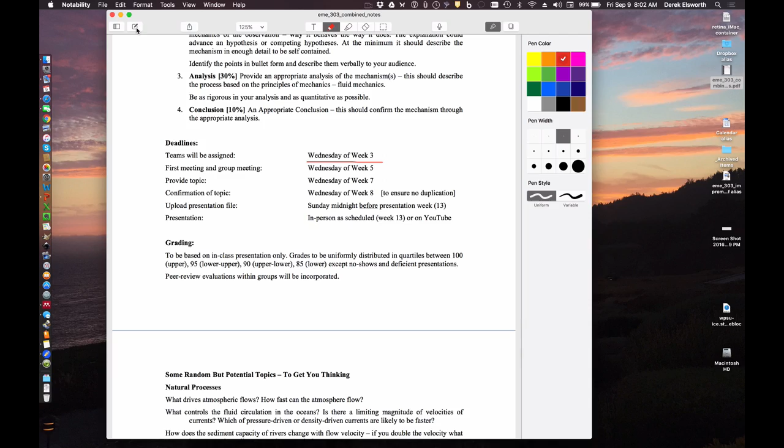So what we'll talk about today is buoyancy, after we finish off our final discussions on forces on structures. That's our plan for today.

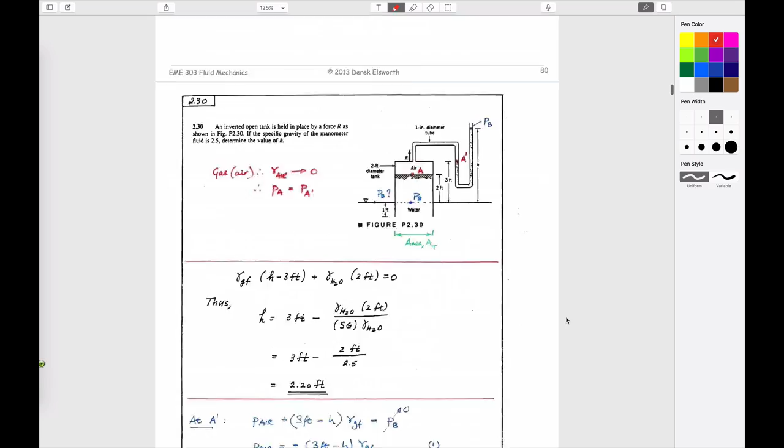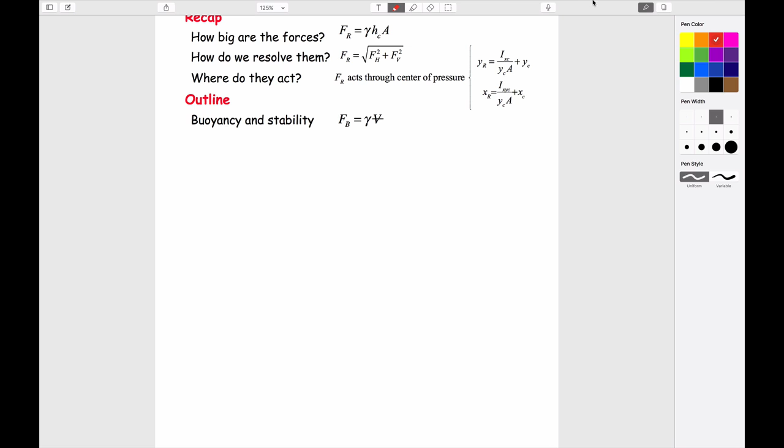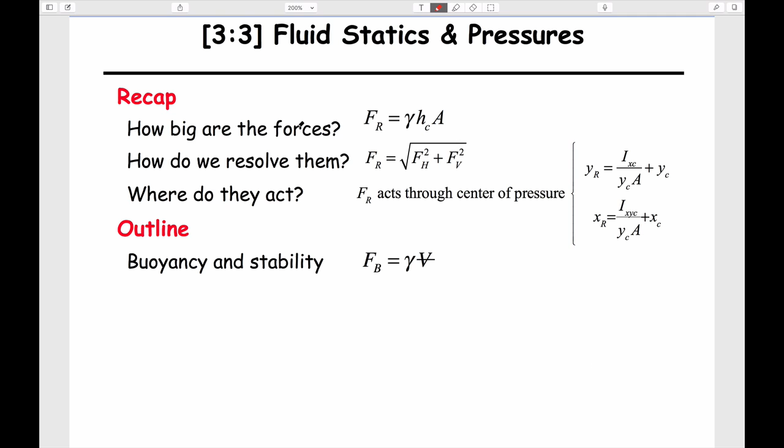And as usual, we have a preview of exactly what we will talk about. So our discussion today will end up on buoyancy, but of course buoyancy is really part of fluid statics and pressures.

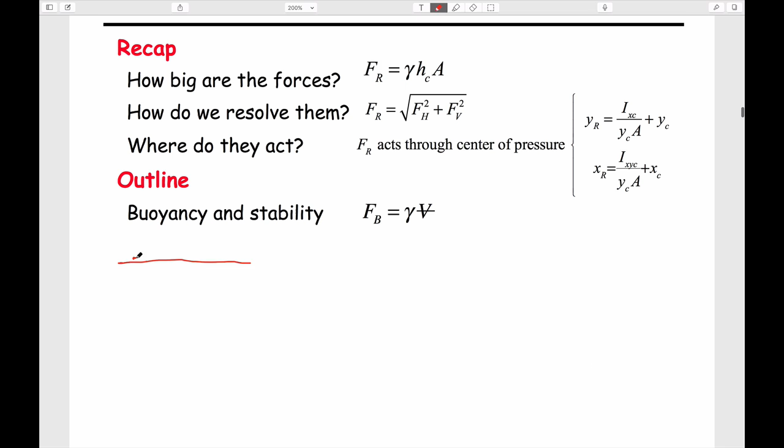We've made the point, it's probably worthwhile restating this, just because it's such a key part of what we're dealing with. And that is that if we have a liquid, and we have, say, a structure underneath that liquid, which is of some length, and I won't draw it in the third dimension, but this is the water surface.

We can always calculate the magnitude of the force acting on that if we know the unit weight of the fluid, if we know the area of the plate, and if we know the depth to the centroid, H sub c. Very specifically, it is the depth to the centroid, not the in-plane length. That is how we calculate the magnitude of the force that would act on this, which would be F sub r.

If we want to know where that force acts, it does not act at the centroid. It will act at the centroid if the fluid pressure is uniform, but that's rarely the case. And so to calculate exactly where it acts, we have a variety of things that we can do.

The first one, so we know exactly where it acts - what we'd like to know is where it acts, and to do that, we will make a coordinate system directed along this plate in the y direction. It will have its origin at the surface, where it intersects the surface. And we'd like to know the magnitude, the location where it acts.

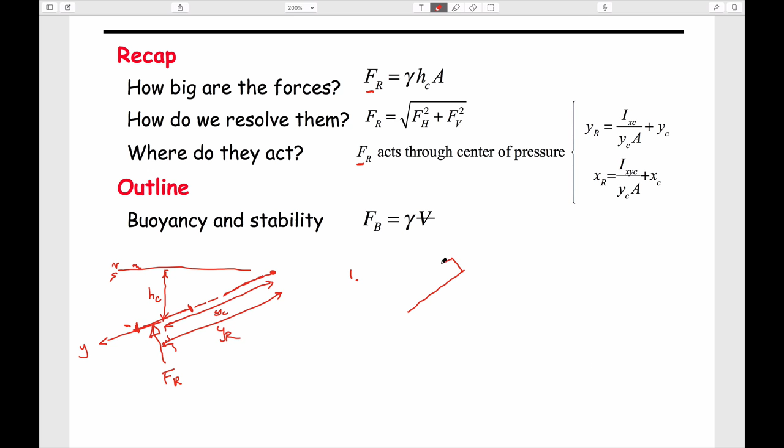And we want to calculate this distance, y sub r, the location of the resultant. That location is offset from the y-coordinate of the centroid, y sub c, by some small amount, by this amount here. We can figure out exactly where that location acts in three ways. The first way is to realize that the fluid pressure distribution on that plate will look like a linear distribution that doesn't start at 0 at the top.

And what we can do is make that into two parts: one which is a triangle, where we know that the force of the triangle acts at 2/3 of the length down its length, if this total length is 1.

We have a force for the square, which acts at half of its length down the length. And we want to figure out exactly where the resultant acts, which is some distance L sub r from the same location.

So we know we can calculate the forces from the areas underneath these pressure diagrams, getting F delta and F square. We know exactly where they act, and we know that Fr is going to be equal to the sum of those two.

And so we can take moments around any point, which will give us the moment that Fr has, multiplied by the length of that lever arm. That has to be equal to the force due to the triangle multiplied by 2/3 of the length plus the force of the square multiplied by half of the length, and the total length is 1.

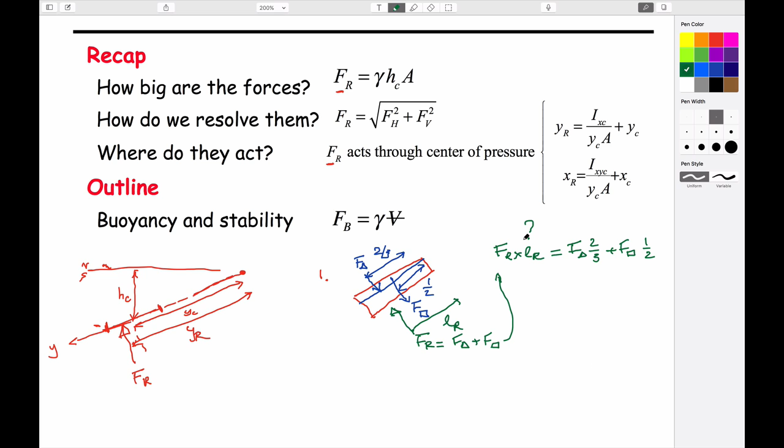The second way you can do it is, if I go back into this mode, we can take this - I'll draw it in perspective now. This is the plate that we have. We know that if we look at that plate, we can calculate the force in the same way, but we can calculate the location where the resultant acts, which will be this point here, F uppercase R.

And if I draw this here, this will be Y sub R, where this is the surface of the water - this is where it intersects the surface of the water. This is the centroid, which is Y sub C. And we can always get it by using this expression here.

Y sub r is going to be equal to this apparently slightly complicated expression, but this is a standard result. This is b times a cubed over 12, as you saw last time, the geometry of this plate. The slope distance of the centroid, the area of the plate, which is this area here, plus the slope distance to the centroid.

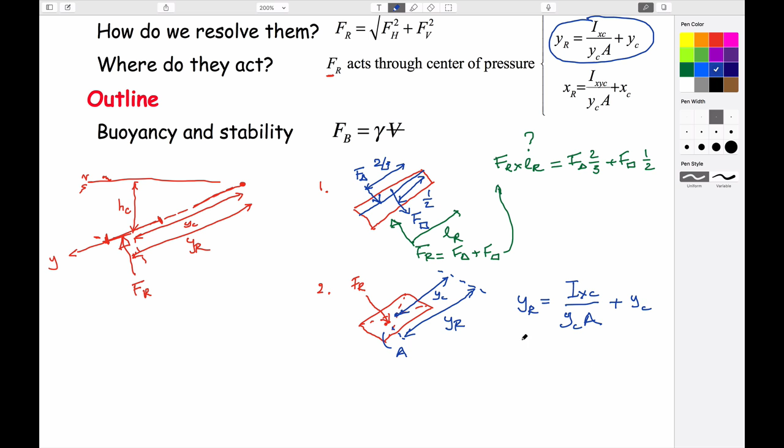So this always tells us, since this number is always 0 or greater, always positive, that it's always going to be slightly below it, as you'd expect from looking at the moments - same rationale. But this gives you it in one step, and you calculate the resultant in the same way, just by using this, where this is the depth of the centroid, H sub c.

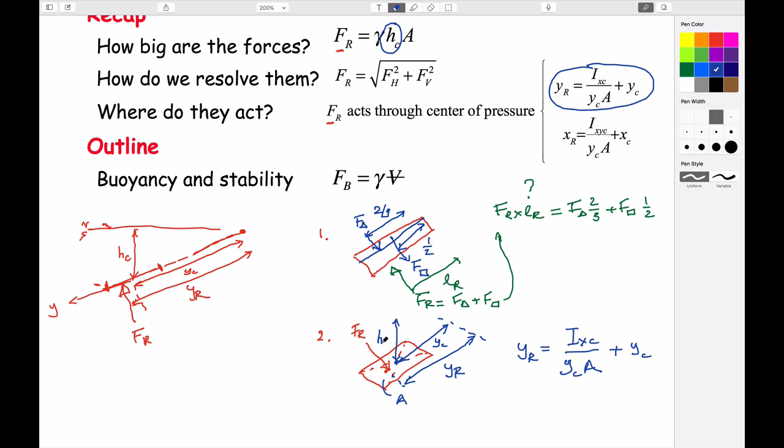And the third way, one of the ways that we'll talk about today, is using free body diagrams.

So very straightforwardly, what you could do is if you had this plane here that intersects the surface, you could draw a free body diagram that included a triangular pressure distribution on one side, a triangular pressure distribution on the other side, a weight of this fluid acting downwards, and also a triangular distribution on the side. Let's not talk about that now, but let's move towards dealing with that - you can resolve all the forces. So that's the third way that you might have to use.

Everything we've talked about so far has been on flat surfaces, a plane. The submarines that you saw are curved surfaces, and so we have to maybe take a different tack to that.

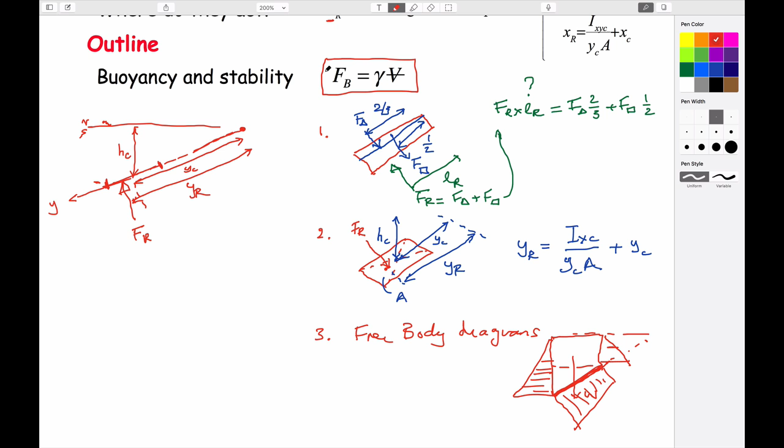The other expression that we'll use today, which is related, of course, to fluid pressures on structures, is the buoyant force that acts on components. Let's deal with that before we move on - you've probably seen this before. It's Archimedes' principle, so let's talk about buoyancy.

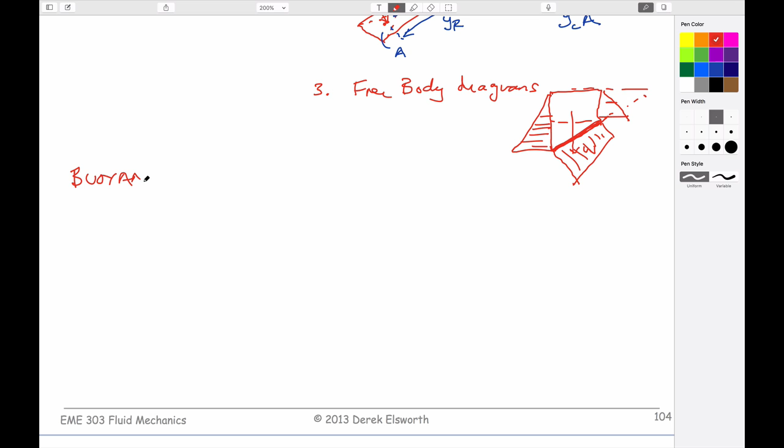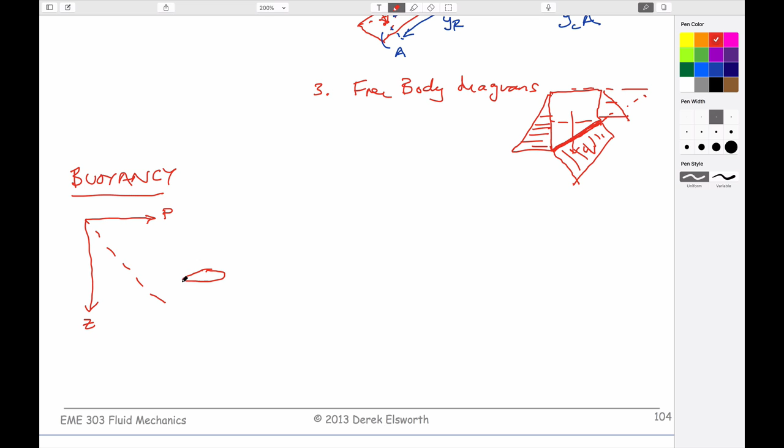And the idea is just this. We know that fluid pressures, as you go down within a fluid, will increase linearly according to the unit weight. We know that if we have a bucket, which was our first entree to this, you can think of it as a differential cube as well. We have a fluid pressure acting here, and we have a fluid pressure acting here.

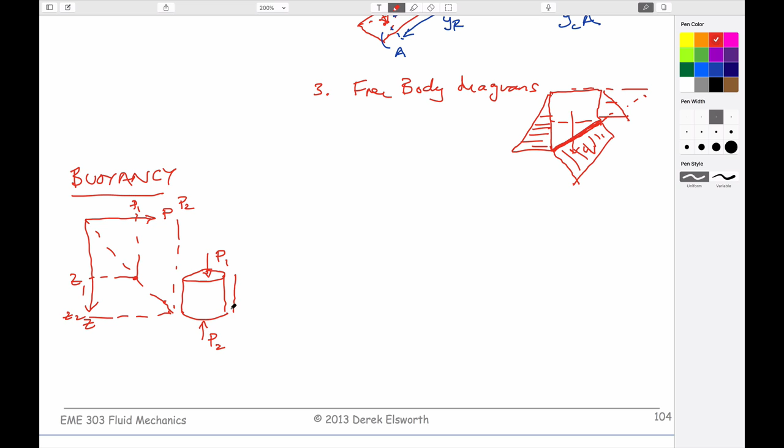We know from this diagram that the two fluid pressures will be different from each other. This is P1 at Z1 and P2 at Z2. P2 is obviously greater than this. This has some height, call it H. And so there's a difference in these pressures because of this.

So if you do an equilibrium calculation for F equals ma, it's not accelerating, so this has to be equal to 0. So if we convert these pressures to forces, we know that the force acting upwards is greater than the one acting downwards, so it would accelerate. So if F is finite, it would accelerate. So what we have to account for is the fact that there's a weight acting downwards.

And we know that when there's a weight acting downwards, this is an equilibrium, because that was our equation for fluid statics. Let's make life easy for us and move this bucket up to the surface so that now it sits on the surface.

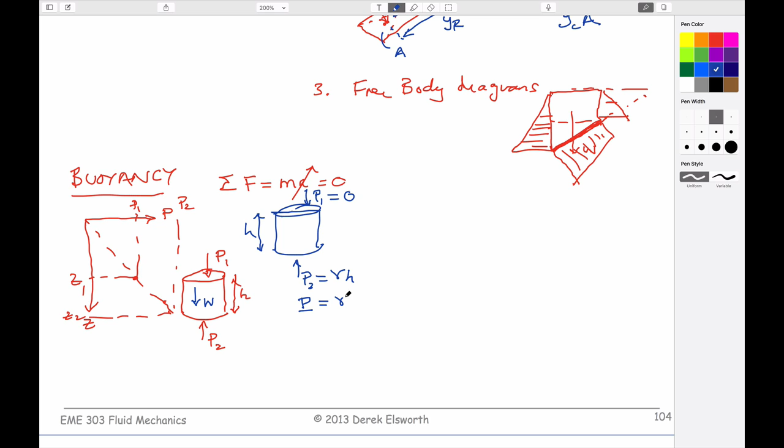The pressure acting here at pressure 1 is 0 because of the atmospheric. The pressure here is equal to the unit weight times the depth below the surface. And the force that acts at this point, which we'll call uppercase P, is equal to the unit weight times the height, which is the pressure, multiplied by the area. This is the area, which is this top of this figure here. This is the area.

The weight acting downwards due to the water is going to be equal to the volume of this bucket multiplied by the unit weight. And of course, the volume is equal to the height times the area multiplied by unit weight. Right? This is this.

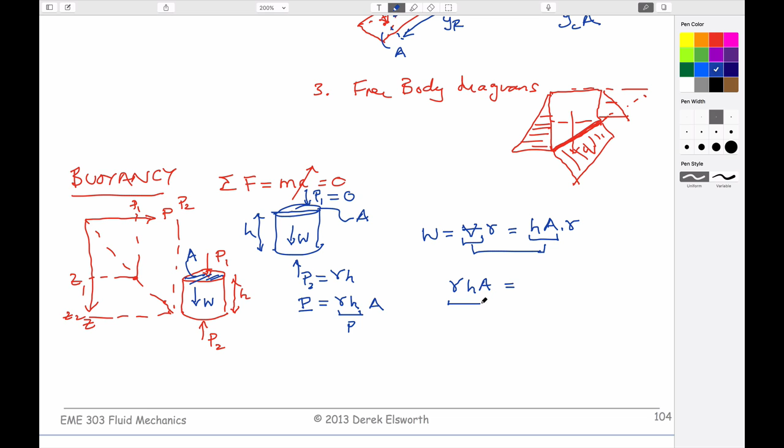And so we know that this is in perfect equilibrium, because the pressure acting upwards, which is equal to gamma HA due to this, has to be equal to the weight acting downwards, which is equal to gamma HA. This is due to the weight acting downwards, exactly balanced by the pressure pushing up.

What happens if you empty out this bucket, a weightless bucket with corners to it, so that the unit weight goes to 0? If the unit weight goes to 0, then this is 0, and there's an extra force that's applied which will pop it out of the water.

And so this buoyant force, due to that, is just going to be equal to the unit weight of the fluid times the height times the area, which is equal to what you know already, unit weight of the fluid times the volume. It's the unit weight of the fluid that is displaced, multiplied by the volume of fluid that's displaced. So this is exactly the same as this expression up here.

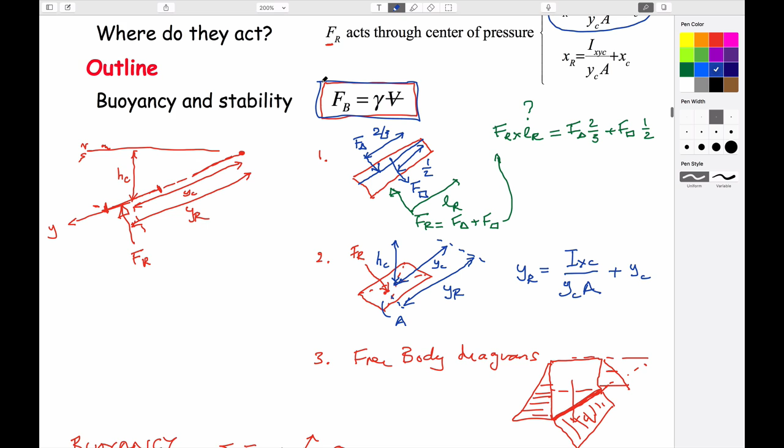I'll go down a second. And so that's a standard result. So that's just the easiest way to derive it. We derived it so the top of the bucket is on the surface because there's no pressure on it.

We know that it's just a difference between the pressure acting on the top versus the bottom. And no matter where you go down here, the difference between those pressures top and bottom for the same height is always going to be the same. And so you can add a pressure on the top, and the difference between the pressures is always going to be an imbalance, which is forcing it upwards. So that's buoyancy as we need it.

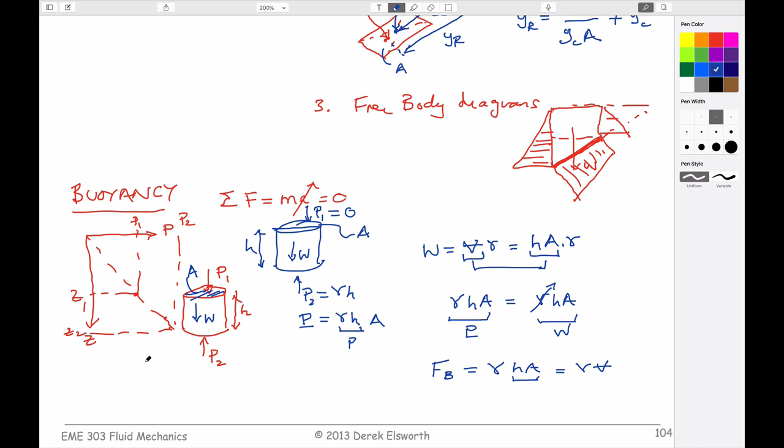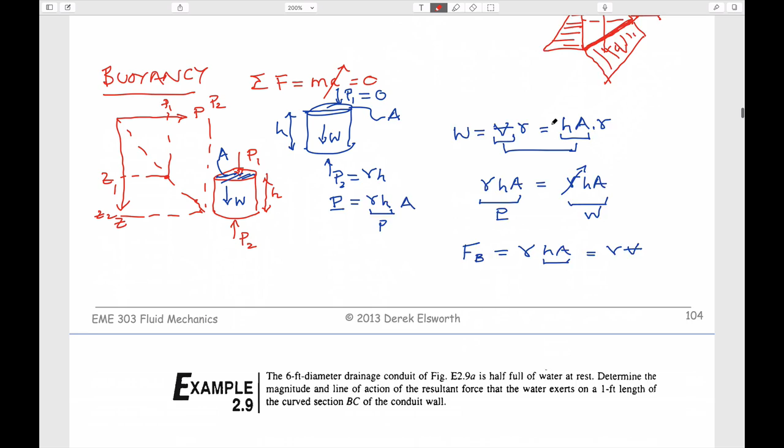Okay, all right, so let's go through some examples. I'll switch this back to my favorite red. We'll talk about force on structures, and then we'll move on to buoyancy after we go back there. We'll do these kind of in broad brushes as to how we might approach such problems.

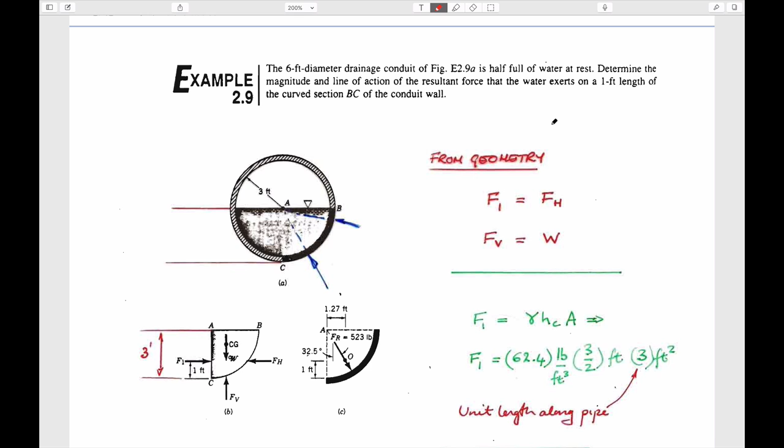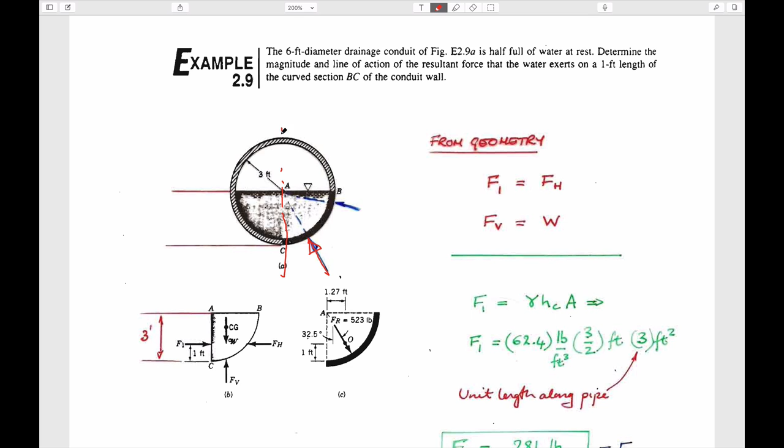So here's the first one. So we made the point that we want to know how to make calculations for fluid pressures on things that aren't flat anymore. One way in which we can do it, if we wanted to try and figure out exactly what the resultant force is that's acting on this side of this pipe, if we cut it down the center line here.

In other words, we cut it on this center line and break it in half. It's actually the third of the methods that we talked about, dividing it into a free body. And so the free body would look like this figure here. And it comprises the actual fluid-filled pipe, which is outlined here.

A force that is applied on the side, which of course would be equal to this triangular distribution of pressure growing at depth to some fluid pressure which is equal to 3 times the unit weight at the bottom.

If it's not accelerating, it has to be reacted against by a horizontal force which we call F uppercase H. And so those have to be equal to each other. So we know exactly how to calculate this, right?

F1 is equal to area, unit weight, depth of centroid. Depth of centroid is going to be what? Area is going to be 3 feet, 1 foot into the page. So this is going to be 3 times 1. And you know the unit weight. So we know what F1 is.

Where does it act? It comes in contact with the surface. It's triangular. So the location where it acts is going to be 2/3 of the depth down. So it's going to be equal to 2 feet.

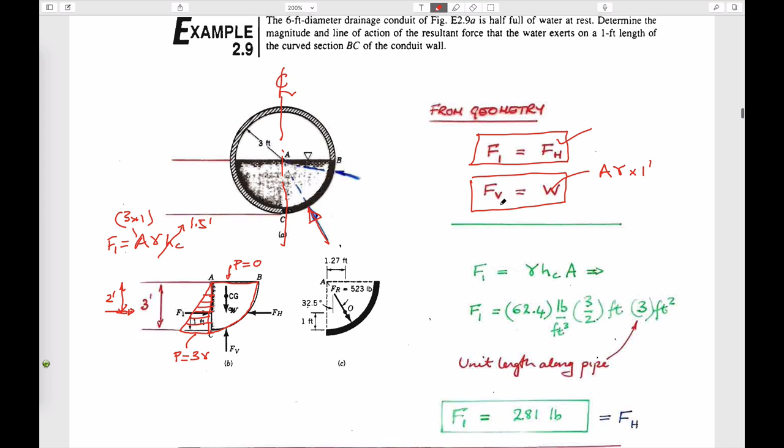Where do they act? How do we find that out? Well, in this example in the book, they say, well, the surface is curved, so all the forces have to be acting perpendicular to that surface. And for that reason, all of these forces have to act through the center here, which is true. You don't necessarily know that, but that's the case.

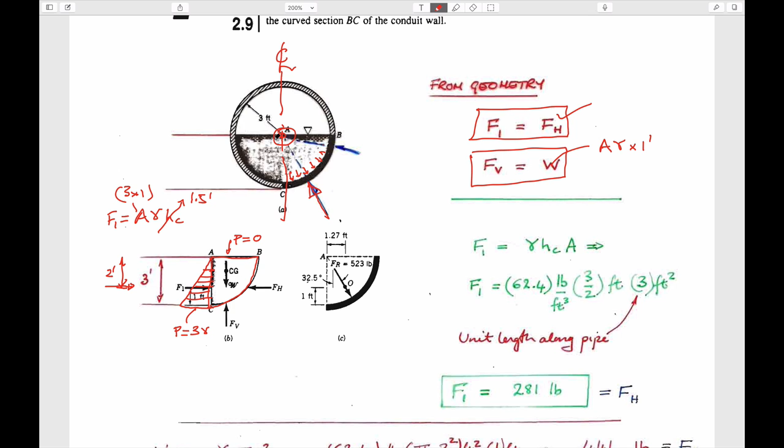What you could also do, if you wanted to know exactly where they act, is that you now know where this force acts, and you also know where this force acts. So presumably you could draw a free body diagram that was like this shape, that had these forces on it.

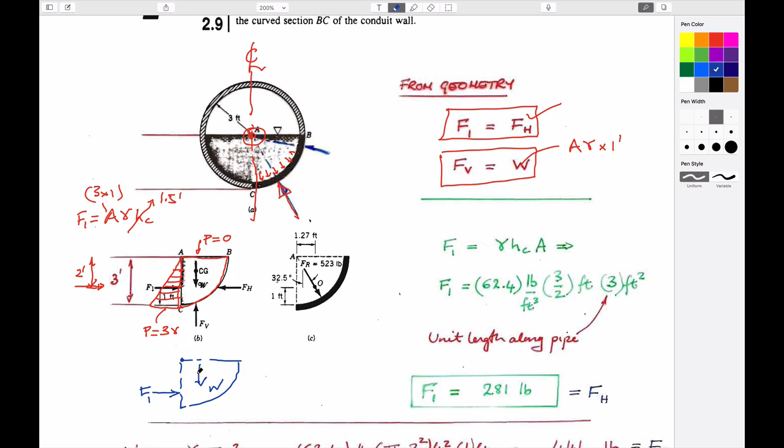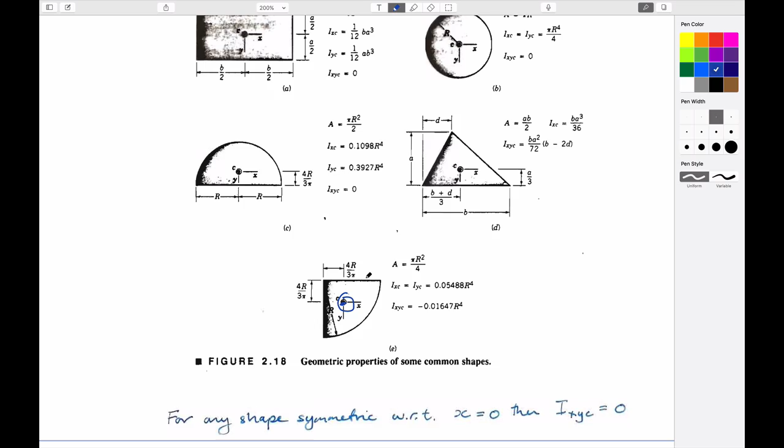It has force 1 acting at this point. It has W acting at this point. You know exactly where it acts if you look at the location for centroid of a quarter circle, which is here. 4/3 r over pi, just a standard result. So you know where each of those act.

And you have another force, Fr. You know what Fr is because you know that W and F1 give you Fr. So you can calculate that if you know each of these. So you know what Fr is.

So that you know the magnitude of this, and so you could do the calculation to be able to figure out, take any point that you want, take the moment of F1 times L1, take the moment of W1 times LW, and take the moment of this around some offset for this, and you'll find that it goes through this central portion.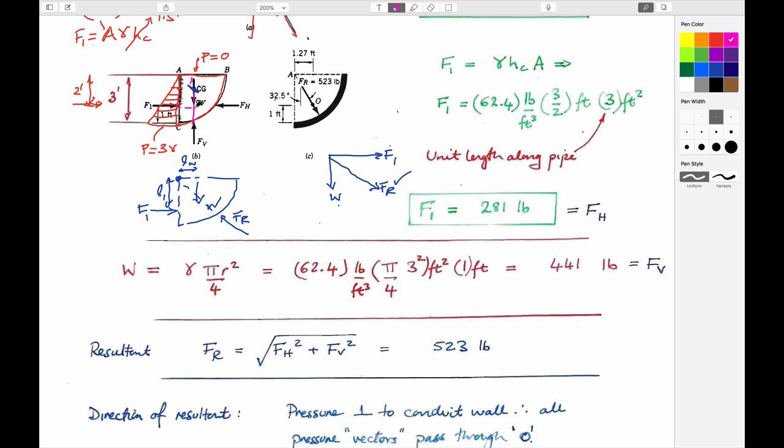So that's the other way to be able to do that. And so you'll find out that actually, because of this geometry, since you know it goes through the center of gravity here, you know exactly where this goes, you'll find out that the horizontal force goes through a point which has to be somewhere on this line here, on the center of gravity, and it'll be exactly through this point, and its trajectory will be through this point O. So you can maybe prove that to yourselves.

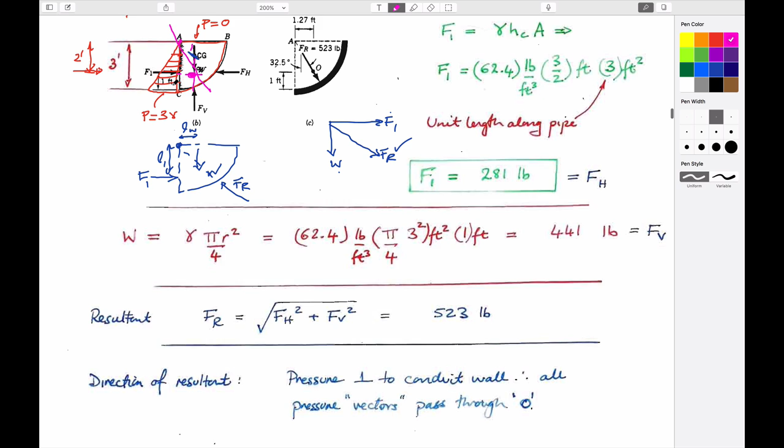So the working's there. So if you don't quite understand exactly what we're doing, then just go through this at your own pace and figure it out. But it's the third method that we talked about in terms of being able to take moments.

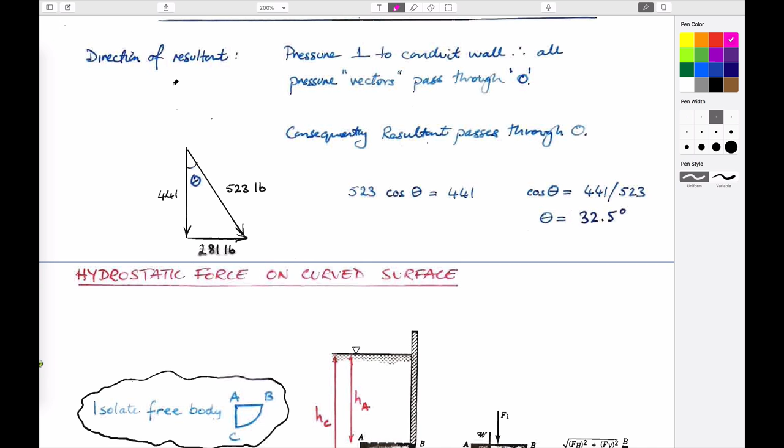So a slightly, I guess a modification on that, well, actually the same question really, that differs only in terms of what the magnitudes of the forces are, is that to calculate what the force is that's acting at the resultant on this.

Again, you can draw a free body. You can isolate this portion and figure out that all the forces applied to it have to hold it in one place. And the forces now are slightly more complicated. The same weight is acting down through this as it was before.

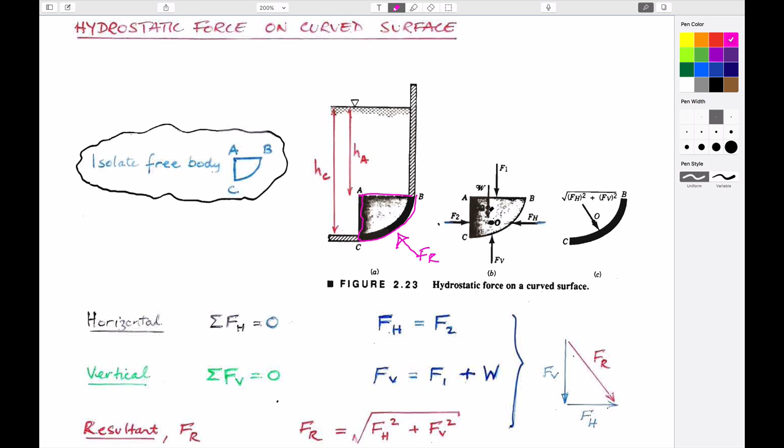The force acting on the side, F2, has to be a little bit different because now it starts off at this place at some pressure. But of course you can still calculate F2.

What would F2 be? Unit weight, depth of the centroid, times the area. The depth of the centroid would be halfway down here. So this would be h sub c from the surface. So you can get the magnitude of F2.

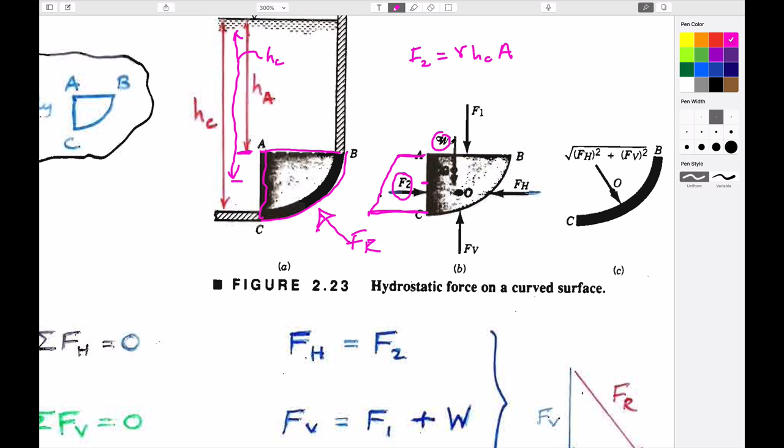You can get the magnitude of F1. It would also be the same way. The depth of the centroid is what? This is HC1, this is HC2. So you get this for F2, and F1 would be the same: unit weight, HC1, times area 1.

The area, of course, is the length of this section here multiplied by the distance into the page. So you have that. So you have this as well.

And to be able to calculate the resultant, F sub r, you can always get the resultant if you know what each of these are. But we don't know what each of these are. So what we need to do is do a force balance.

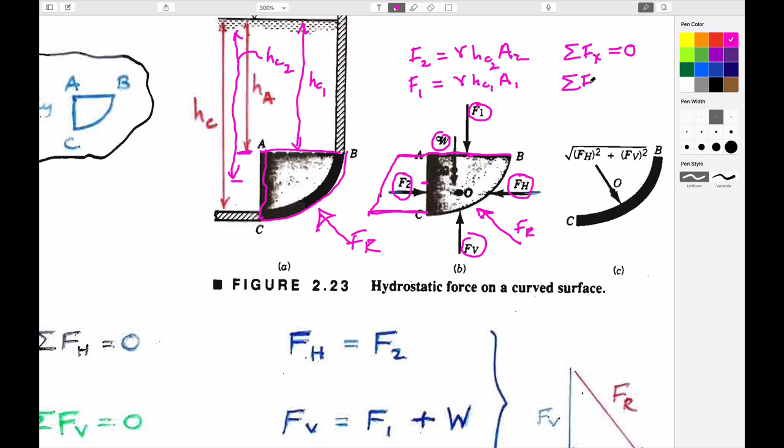Sum of the forces in x has to equal 0. Sum of the forces in y has to equal 0. So, zooming out one step: if you do the balance in the horizontal direction, F2 has to equal FH. We know what F2 is because we said we can calculate it, and so we can calculate the magnitude of this.

We do a balance in the vertical direction. We know F1. F1 plus W has to equal FV. We know F1 from this expression here. We know the weight that's applied because of the volume and unit weight. And so we can calculate what this is.

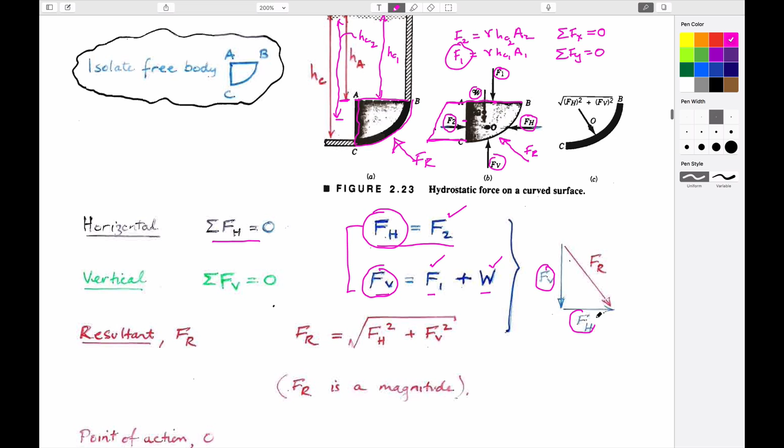If we know both the horizontal force and the vertical forces, we can calculate the resultant just by using Pythagoras, which is this.

And if we wanted to be really smart, we could use exactly the same technique as before by taking moments about a point to figure out where it acts. But let's not do that.

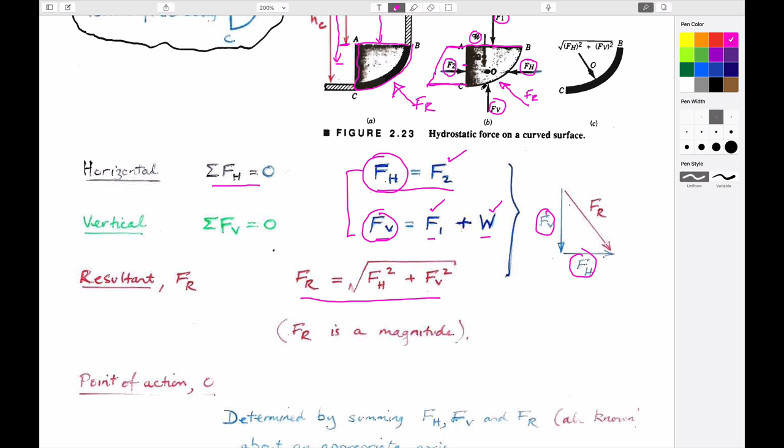So it's just a matter of dividing it up into something you can imagine cutting a contour around this thing so that you can release it, and then figuring out what forces are applied to it to keep it in place. A fluid pressure on the left-hand side, balanced by a reaction by the wall on the right-hand side. A fluid pressure acting on the top, plus its weight, balanced by an upward force of the fluid of the wall at the base. And you can work your way around it.

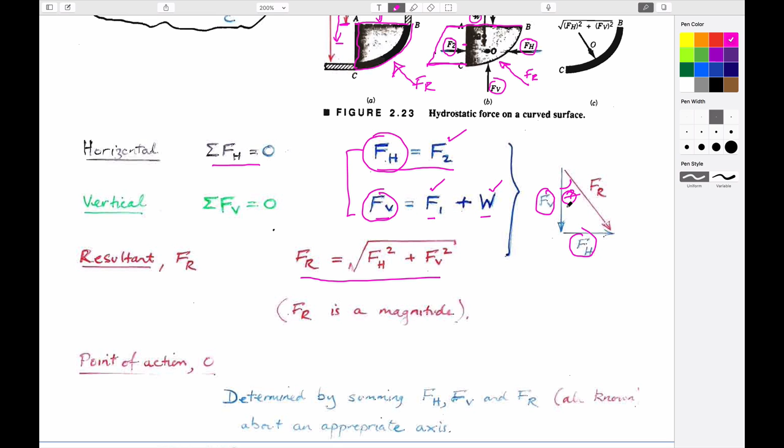If you know the magnitudes of these, you can also calculate the angle theta from this as well, uniquely. So it's just trigonometry that you have to use. It becomes a little bit of housekeeping, but I'm sure you guys are up to it.

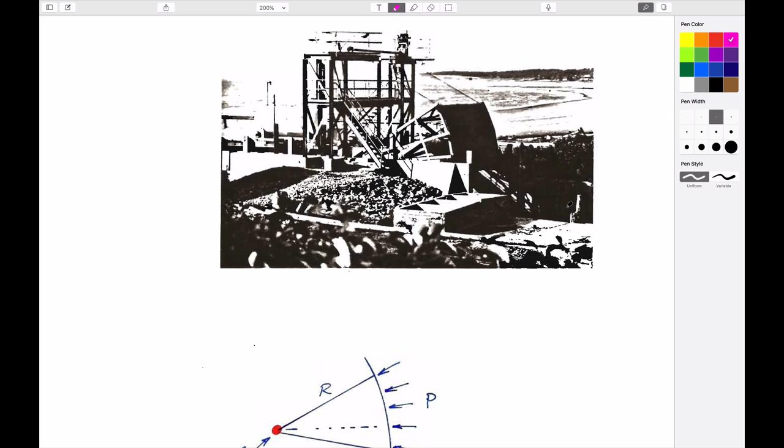Yes? Well, look at these and use the TAs if you're having problems with it.

Tainter gate. This is a picture of a tainter gate, actually taken many years ago in Nova Scotia. The idea of a tainter gate is that from this idea of curved surfaces, if the gate is an arc of a circle, then by definition, all the fluid pressures are acting perpendicular to that surface.

And so by definition, they are all directed directly through the center of that circle, and therefore there's no net moment applied to this. So if you take the moments about this circle's center, you find there's zero moment. There's a big force that acts in the horizontal direction, but no moment applied to the gate.

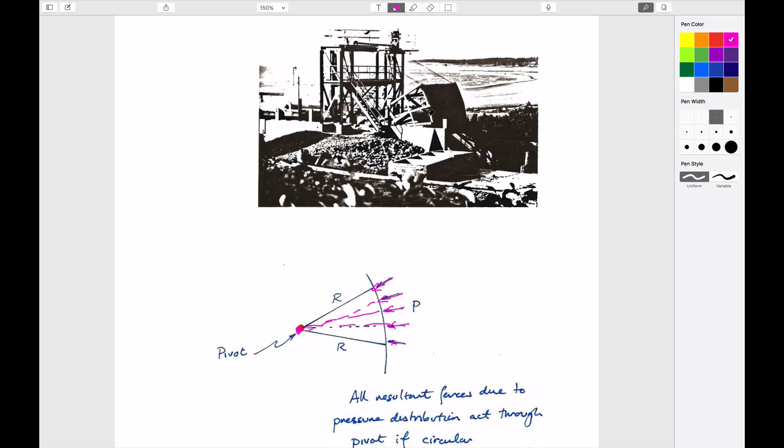So the net result is that you can make a gate that is pretty flimsy, just with these metal struts in this particular case, and with a flat surface on the back. So a tainter gate is exactly what that is.

So we won't talk about that. Mega tsunami, too complicated, too complicated.

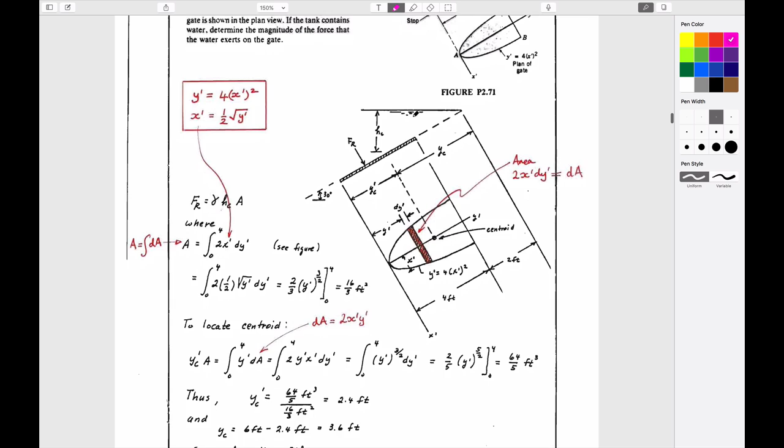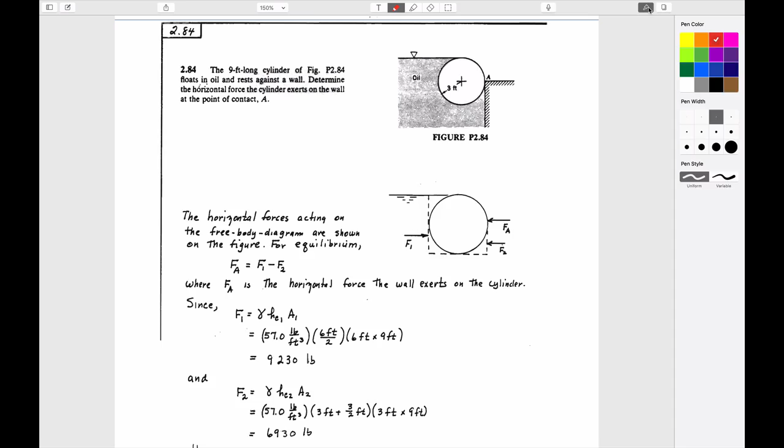Let's do some others. We'll morph into talking about buoyancy in a second, but this may be the final one that we talk about. Let's just talk about this, again in terms of how would we solve this problem.

So here's a question. You have a cylinder floating in oil. Oil comes up to the top of the cylinder. The cylinder butts against a wall. Not sure exactly what this is supposed to be, why you'd have a big puddle of oil, but no matter. The question is, what is the force that gets applied against this component here, FA here.

And so what do we know about this? How would we deal with this as a free body? Well, if we want to know what FA is, we can just divide it into a free body, and the easiest way is to divide it into one that includes all the different parts of this. So this is the free body that we're going to take. It's kind of outlined here.

There's a fluid pressure that acts as we go down here on the left-hand side. I guess the other thing we could also say is that we need to calculate FA, so we need to sum the forces in the horizontal direction, and they need to equal 0. Also, what has to be true is that the forces in the vertical direction have to be 0 also, but we're not asked that, and so we don't care about this.

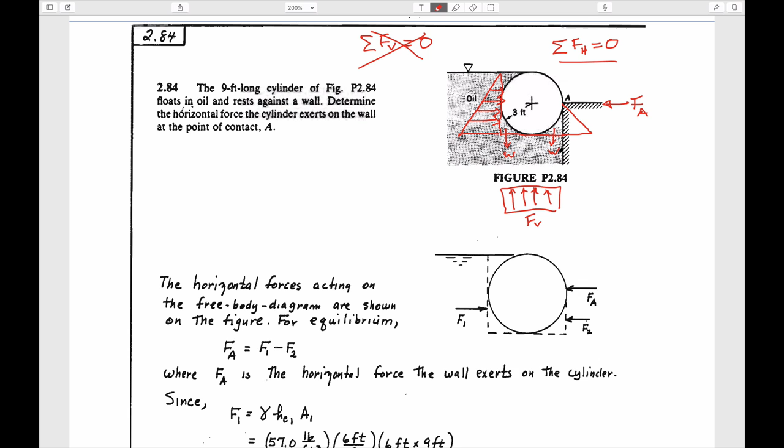But that really can't be the case, because we know that if we go from this point here, where the pressure will be this amount, and we go through the fluid to get to this point here, we're still at the same elevation. We know that dp dx equals 0. So the pressure here has to be exactly the same pressure as here.

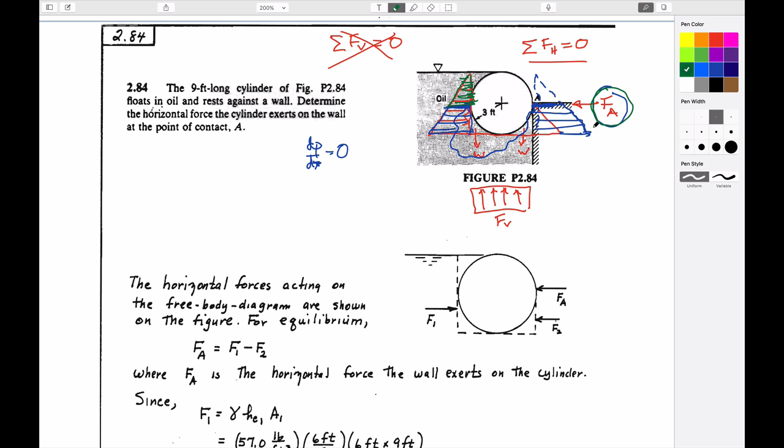So if you do that, you can do the calculation. F1 is equal to what? Unit weight, times the area of this plate, which would be this area here, this is the area. The centroid of this plate is going to be equal to this here, which is HC.

And we know F1, it's just going to be equal to this distribution here. We know that F2 is going to be given by exactly the same equation. What are those going to be? Well, the plate is going to look like this if I draw it in perspective.

The height to the center of this plate is exactly the same as if it was on the other side, from the surface, because that's really where the water is coming from. So you can think of this as an imaginary surface here, because this is going to be the average magnitude of the pressure, which is HC2, this is this here.

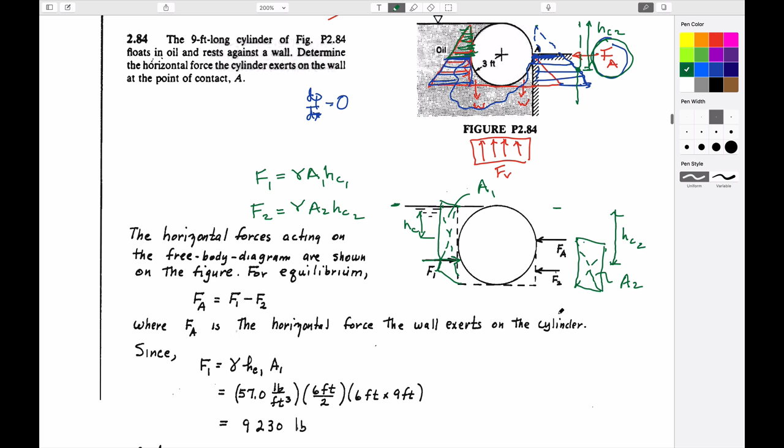And the area of the plate is just going to be A2. And so you have this here. And so physically, it'll give you a smaller force acting F2 than F1, and therefore FA has to be a positive number. So this is physically how to do it, but this is conceptually why it looks that same way.

The total area of this triangle is acting on this side. The truncated area of this triangle is acting on the other side. And so you have to basically add another green force on the top, which is equal to FA. Same thing. So you could think about solving it in a couple of different ways.

Okay, so the key thing to figure out is that this is not atmospheric pressure acting at this point. And so it has to be sealed. And so you could imagine that since the force acting to the right is larger than the force acting to the left, then it's physically pushed up against this wall, and that's what causes the seal here.

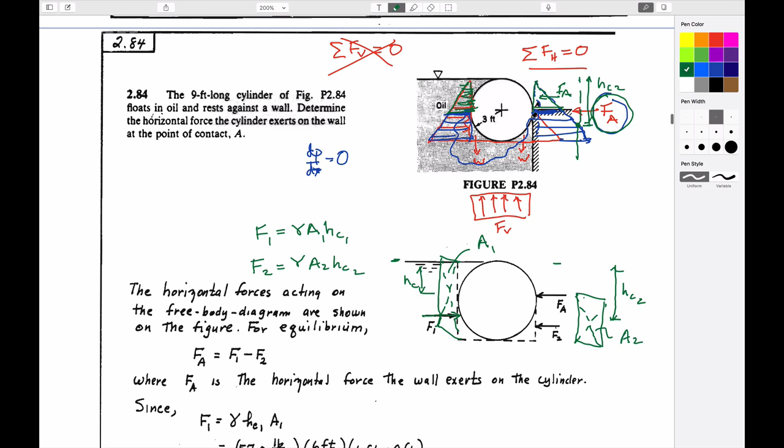So this layout here is basically an exposition of what we just said, and I won't go through this, but I'll let you show this to yourself.

This is the idea that we have a gate here, which is inclined, which is 1 meter high, has water held up behind it. The gate's at 45 degrees, and so we know the length of the gate is 1 meter times square root of 2. It's water behind it. And it's just to make the point that we can solve this problem in 3 different ways, and we should get exactly the same results either way we do it.

We could do it by the Centroid Method, which is the first one -- well, it was the second one we talked about when we started off today. And that is, we could look at this as a plate which has a centroid on it. We want to find out where Y sub R is, and we can do it by figuring out what the force is by this expression, where it acts from this expression, and we find out that these are the forces, and this is where it acts.

We could also do it by the pressure prism approach, where we take this gate and we divide it into the pressure prism that acts on it, which we know is this one. So this is really the first one that we talked about today.

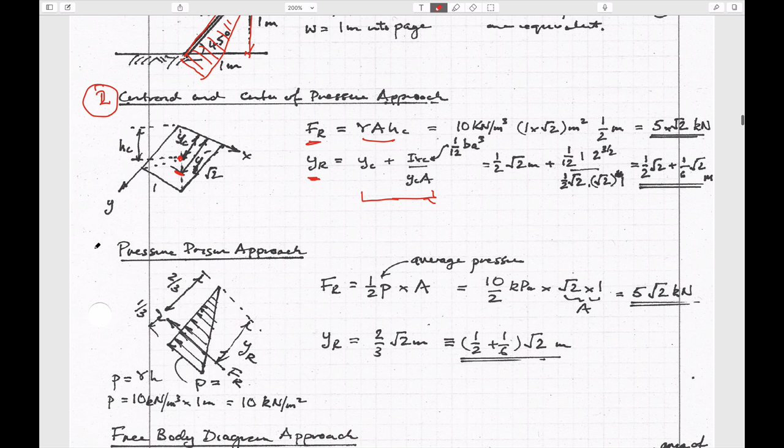We know that the pressure at the bottom of the gate is just going to be equal to the depth y times the unit weight. We know that it's a linear distribution. We know that for a linear distribution, the resultant will act 2/3 down the distribution, or 1/3 from the bottom.

And so we know where YR is, and we can also calculate the magnitude of the force just by taking half the pressure in this particular case. So in other words, half the maximum pressure would give us adding this amount and subtracting this amount, if you understand physically what we're doing. So we can get the magnitude of the force just by looking at this pressure distribution, calculate it how you want. It's just the area under this triangle, which is equal to half the magnitude multiplied by the total height.

Or you could take the magnitude here and divide the total magnitude by half. And the location where it acts is 2/3 of the way along the length of this boundary.

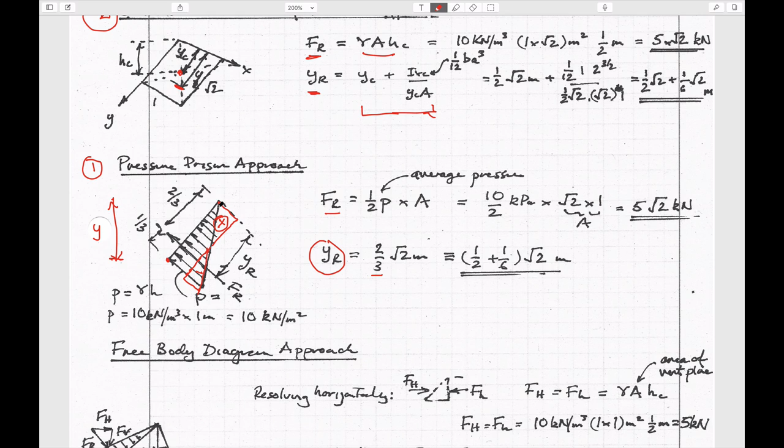And if you really want to torment yourselves, you can also do it by taking a free body. This is the gate. This is the pressure prism that acts on that gate. This is the free body of the fluid underneath it. We know the fluid pressure that acts on the bottom of that block of water.

We know the pressure that acts on the side of that water, and we can resolve to figure out exactly what the resultant is. And so certainly we can calculate what this is and know where it acts.

And we can calculate the magnitudes of the resultant by basically equating this. If we know what the horizontal force acting here is, we know that has to equal this.

If we resolve vertically, we know that this has to be true. We do know what this is, and what this is. So we can calculate the magnitudes of these other numbers, which are these two here. If we know what this is, we can calculate the value of the resultant. And if we know the magnitude of the resultant, we can then take moments about any single point we want

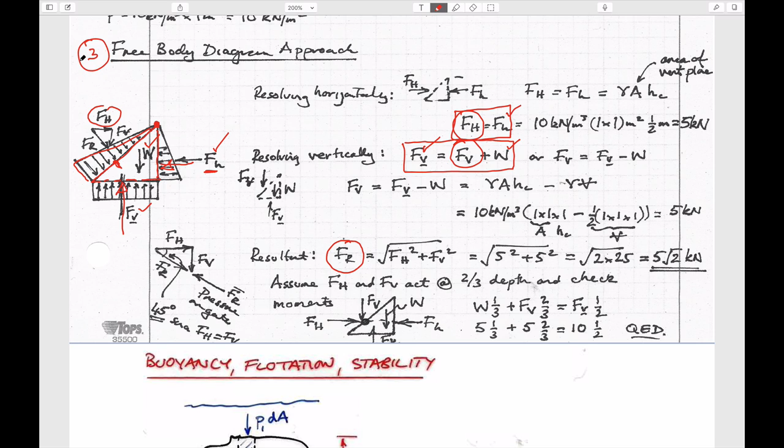So the last one is kind of a complicated one, but it does make the point that all of these three methods should give you exactly the same result. They're not different at all. They just are different ways of doing the calculation. So the last one's kind of overly complicated, but it does make the point, and if you feel so inclined, you might check it.

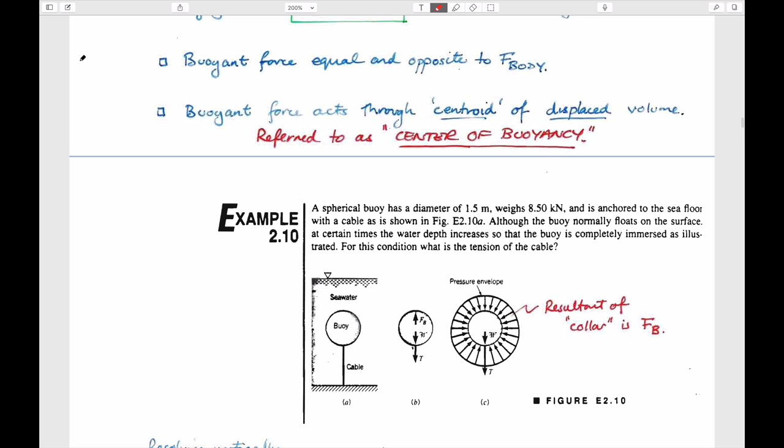So let's switch gears. We made the point that forces acting on structures is really the equivalence of buoyancy, or buoyancy is the equivalent of that behavior. And it results because if you look at the pressure distribution on, say, a structure, and you remove the fluid from inside that structure, then all of a sudden there's an imbalance of the fluid pressures at the bottom, overwhelming what was in equilibrium because of the weight of that container. And that net force is the buoyant force. And so again, if we look at structures, we can calculate free body diagrams of exactly what's going on.

So here's an example to calculate what is the tension that gets applied in this cable if you have a buoy which has a certain volume. So again, we know that the buoyant force is going to be acting upwards against gravity. We know the weight of the buoy, whatever it's made of, steel or whatever, is acting downwards. And we can presume that in the cable there's some tension that's acting downwards. So that's basically what's given in this free body.

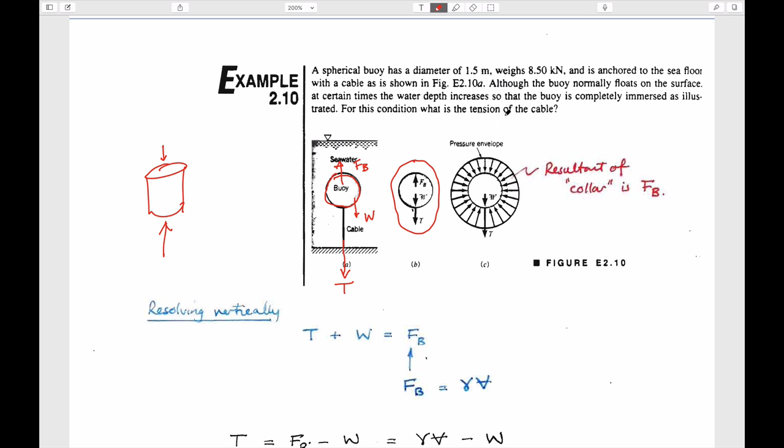The reason for buoyancy is that the fluid pressures acting downwards are less than the ones acting upwards at depth. We know that. We just did that for our container that looked like this, where there's a bigger force acting up relative to a smaller one. This is what it would look like on a structure, but it's basically the same idea.

If we resolve things vertically, we have the weight and the tension acting downwards. We have the buoyant force acting upwards. We know the buoyant force is equal to the volume of fluid displaced multiplied by its unit weight. And so if we know what the weight of this is, if we know what the buoyant force is, then the only thing that we need to calculate is the tension. So again, just resolving vertically. And so all that's important, I guess, to remember here is that the buoyant force is the volume, the unit weight of the fluid that's displaced. It's not the density of the structure, it's the density of the fluid that's displaced.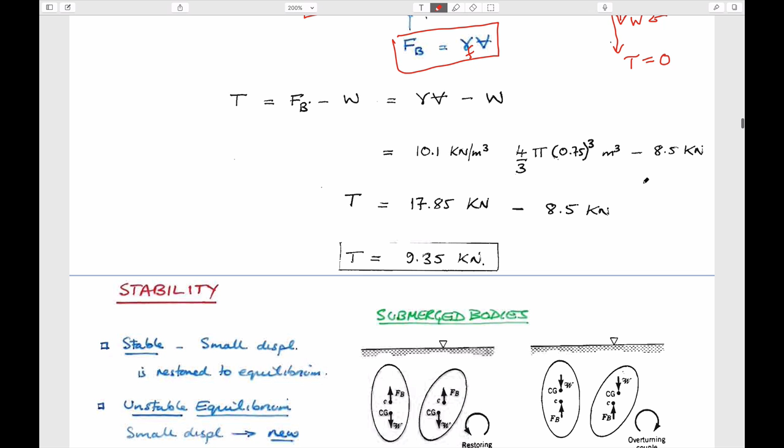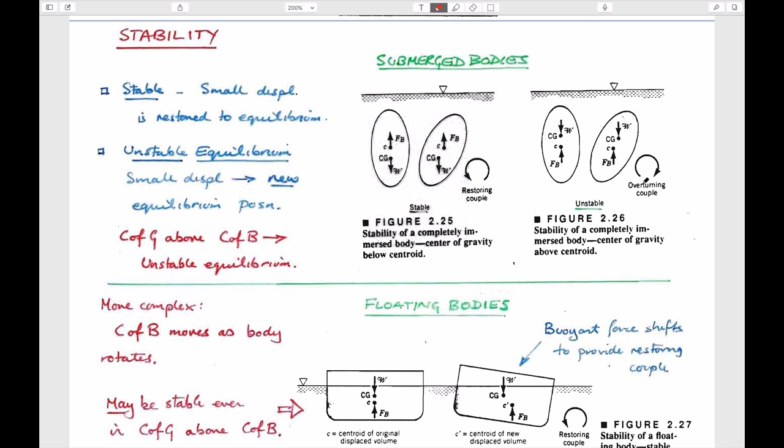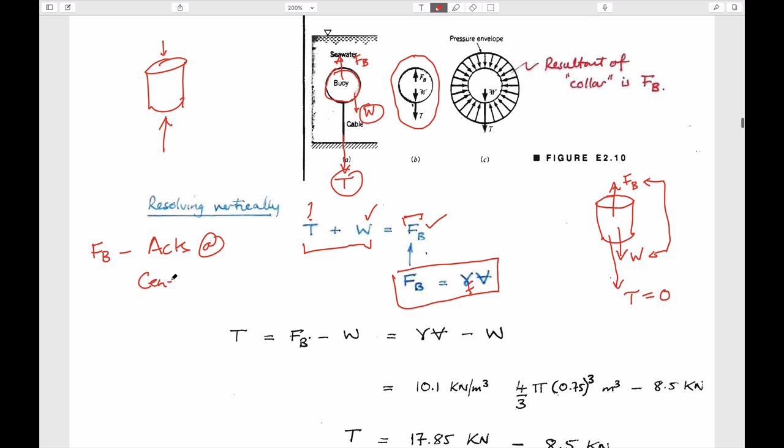So the other thing that we can also talk about is stability. The one thing I didn't mention, which I should mention, is that the buoyant force, it acts, we need to know where it acts. Center of buoyancy. Center of buoyancy is equal to the centroid of the displaced volume.

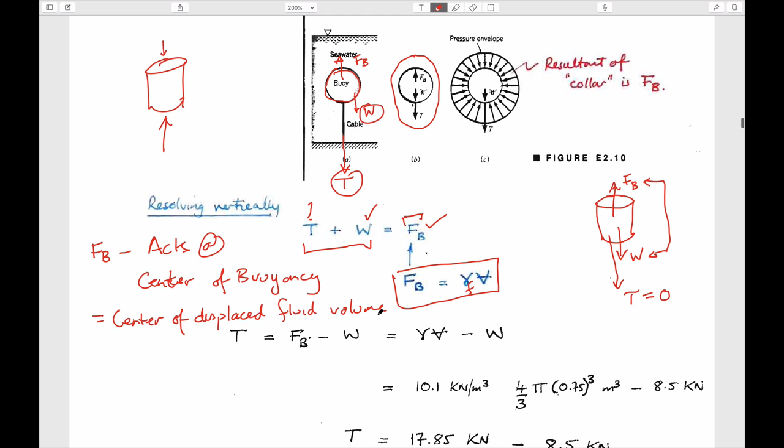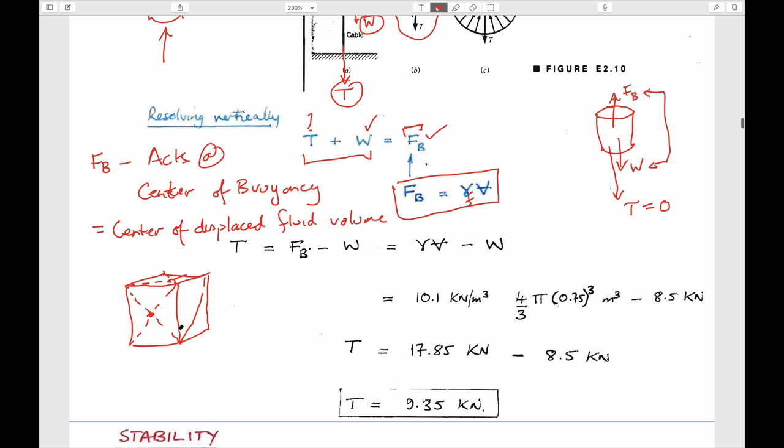So as an example, if we had a square block, then the center of buoyancy would be at the centroid of that block. In other words, you could draw lines here and it would be on that axis. If you drew lines on the top, it would be on that axis. And if you drew lines on the side, it'd be on that axis. So the bottom line is that it's dead in the center of this.

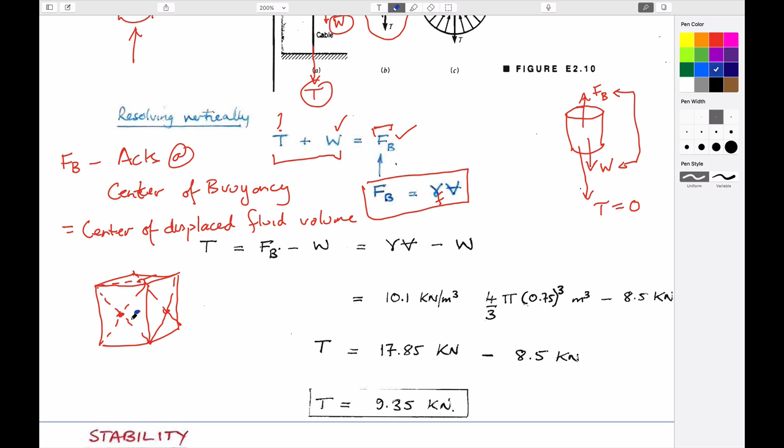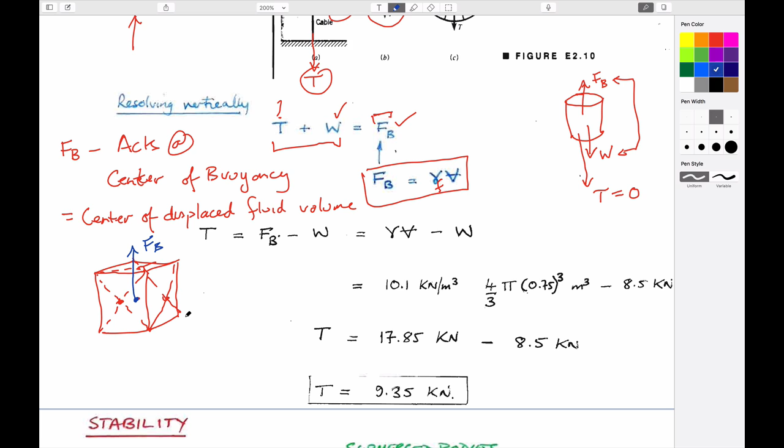It's at the centroid of this volume. We've talked about centroids of planes because that was relevant to us, but the centroid of a volume, I don't have a volume on me, but the centroid of a pack of cards would be the dead center of that pack of cards. And so that is where the center of buoyancy acts, and this is the location where FB acts. If this has a mass, then the center of gravity of that thing, if it was uniformly distributed, would also be the same point. So if it was submerged, the two points would be coincident, but that's not always the case. And that relates to stability.

Stability is the propensity of something to capsize, if you like. The easiest stability problems for us to do are for things that are submerged, in other words, the whole body is below the surface. If the whole body is below the surface, the center of buoyancy is going to be the centroid of that displaced volume, and so no matter how you turn this body around, it will always be at the same point.

If this structure was weighted so that there was more weight in the bottom, such as in the keel of a boat, than there is in the top, then the center of gravity, instead of being at the centroid of this mass, would be below it. That's probably good, right? If the center of gravity is below it and you pull this over a little bit, then if you look at the moment applied on this structure, the net moment pulls it in this direction. This is pulling downwards, this is pulling upwards, so it'll tend to push it in this direction. If it pushes in this direction, it puts it back in its right place and it doesn't go anywhere else.

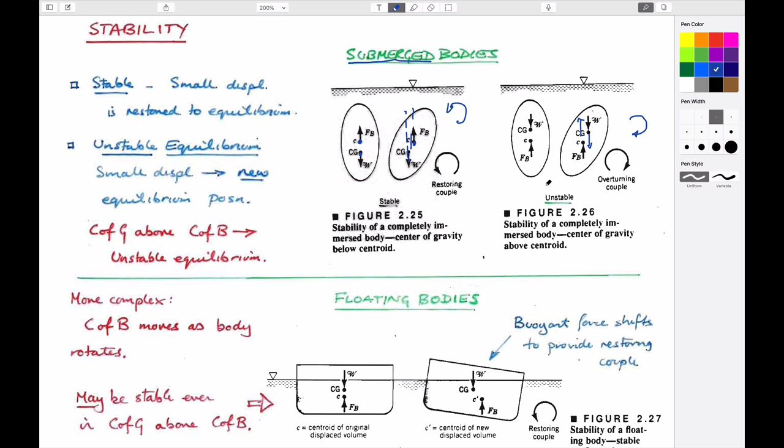If the center of gravity is above it, the exact opposite happens. You pull it off course by a wave by a small amount, and now the force acting downwards and the force acting upwards give it a moment, or a couple, that turns it in this direction, and it gets progressively worse. It will just go until it turns upside down completely, until it's in the configuration where the center of gravity is below the center of buoyancy. So that's stability, and you can probably rationalize that in the things that you've done.

Exactly the same thing applies for floating bodies, but it's slightly different because in a floating body, all of a sudden, the area that's submerged, in other words, the area included in this contour here, changes as you tilt it over. It was this area here, and now it's a slightly different area. The center of gravity won't change because it's based on the cargo that's in this ship. It's fixed, hopefully, in one place so it doesn't move. So the center of gravity, the balance point where you'd hold this ship and it wouldn't move, would always be the same.

But the center of buoyancy will change because it's related to the displaced volume of fluid. There's more fluid volume displaced now on this side than there was on this side, and so the center of buoyancy will migrate over to the right, and it's here. In this particular case, it's good news, right? Because the force acting upwards is here, the force acting downwards is here, and so the moment that it applies turns it back so it's horizontal again. So the boat's horizontal - that's the boat you want to be on.

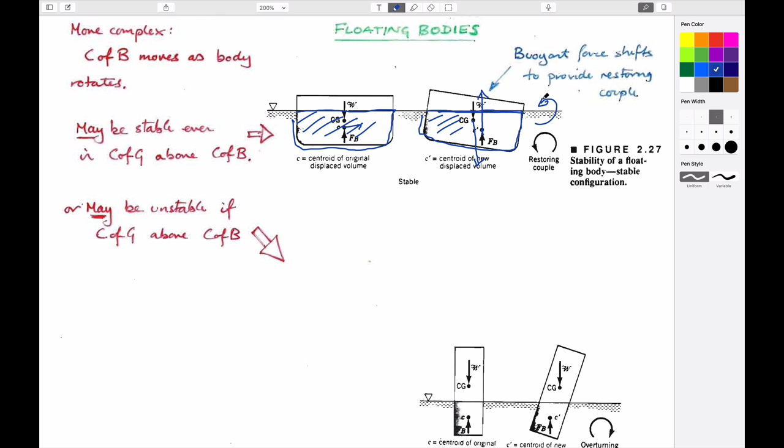The boat you don't want to be on is where, as in this bottom case, the center of gravity, which doesn't move, and the center of buoyancy below it - if you tilt this boat slightly, now the center of gravity is to the right-hand side of the buoyancy. The net moment that's applied is clockwise, and this will just keep on getting worse, and it will do exactly what we did before. It'll either lie on its side, or it will go completely upside down.

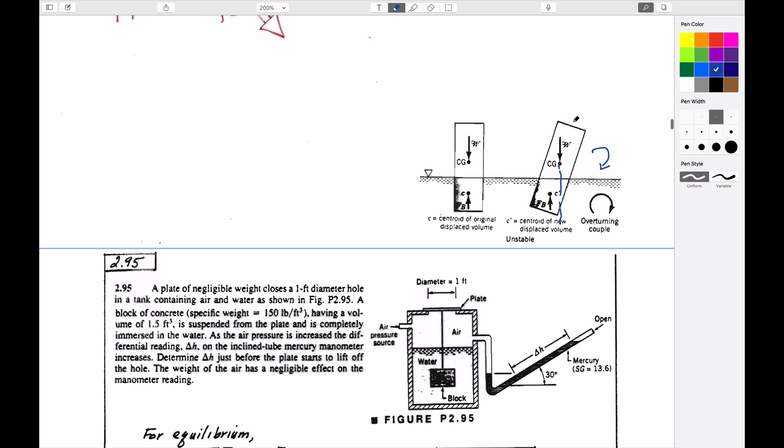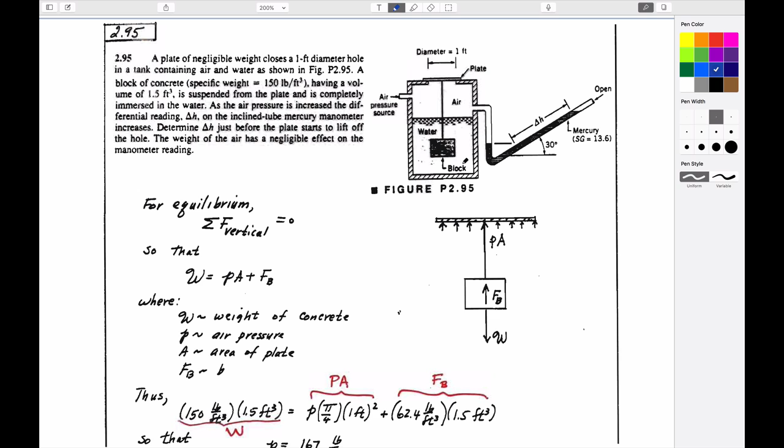So those are the things that we'll talk about in terms of the final example here. We won't have time to go through it. You might look at last year's video - we certainly went through it last year. It's just an example to illustrate buoyancy in a bit more complicated way.